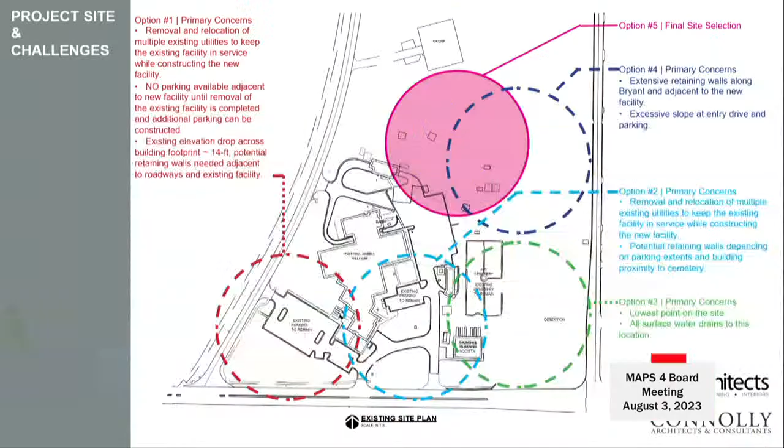Okay, so I want to start with talking a little bit about the site plan. Our location for this project is on the existing property of the existing animal shelter, which is located on Southeast 29th Street. Southeast 29th Street along the bottom here. On the west, we're bordered by Grand Boulevard, which is the road that goes through. Just Trosper Park is just to the west of that. And then over on the east side, we're bordered by Bryant Avenue. And so this is the existing site.

The existing building is located right here. And so it's a fairly large site that we have to deal with, about 14 acres, but our building is very large also. It's about 20,000 square feet larger than the existing facility. So we're looking at a 67,000 square foot building. So it has presented some challenges, even though this site is about 14 acres, all the way up to the very north there's an existing Oklahoma City Highway Patrol building. So from there down, we have about 14 acres to work with, but it is a very challenging site in that we have several obstacles.

We have the existing building that must remain in place while we build the new building. And then just to the east of that is the existing Humane Society building here that must remain. Most people don't know, but there is a pet cemetery right here in the dead center of the property, and that needs to be undisturbed during this project. And then the primary corner, the southeast corner of this property, is actually the lowest spot on the site. So that's where all of the stormwater drains to, which is not ideal for building a building. And then we have all the utilities that come in and feed the existing buildings. So there's several utilities here off of 29th Street that come into the building. There's also a sewer that runs across just north of the pet cemetery that feeds the existing building.

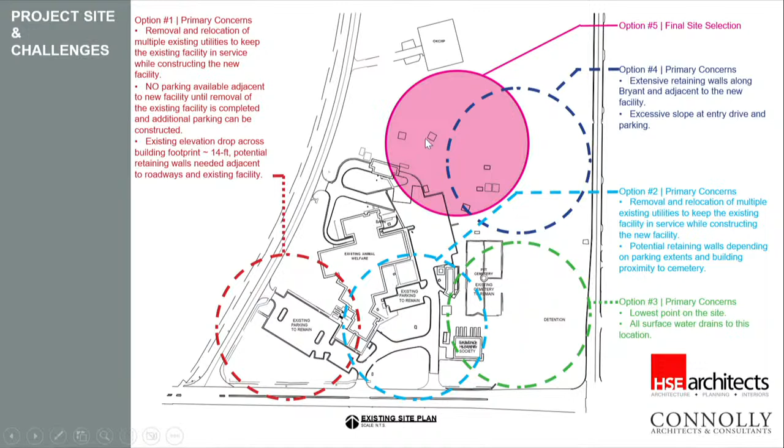So this is our current preliminary site plan, and you'll see the building footprint there in the red color is our proposed new building location. You can see we've moved it all the way to the north of the property. The existing cemetery is here, just right south of us, which allows us to stay away from the sewer that goes right through here.

And then the detention area that's going to be required for our new building can be located in this southeast corner, that's the low spot of the site. Humane Society stays right here. And then we're proposing to leave the existing parking for the existing building so that they can use it for overflow.

They have large events, adoption events on weekends that bring 1,500 people in a day. So the parking we are proposing to provide is adequate on a daily basis, but if we have a large event, they could certainly use this overflow parking. You can see here the entrance off of Bryant works well. We pulled the parking about 60 feet off of the street, which allows us to maneuver that drive, get up into the parking without any retaining walls.

The parking here for customers on the east side is 102 spaces, and the parking on the west side, which would be used for staff and fleet parking, is 142 spaces. And then we also have a new barn that would be associated with this project as well, and the pasture for that barn would all be down here in this green area.

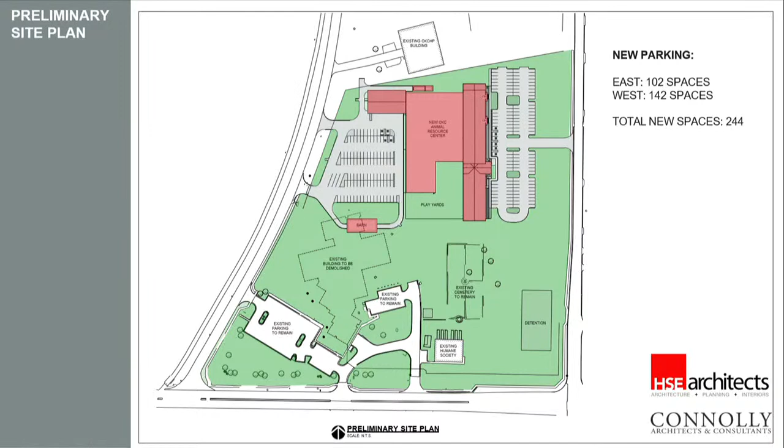Okay, this is what, a little delay there. Back.

There we go. So this is the overall floor plan of the building.

The next two slides are actually enlarged floor plans. Looks like we lost some information over here on the side, but just to orient you, this side over here is the east side that faces Bryant. So this would be the main public entrance for all of the functions of the building.

This baby blue area is all the adoption area. This is where the public would come during these adoption events or just on a daily basis to adopt an animal. Just north of that, in this tan area, is a large meeting and training space that could also be used by the public. The blue area is the clinic, and there would be a public entrance here on the front for the public to come in.

And then the red area is what we call intake, and that's where the public would bring a surrender or a stray animal to drop it off.

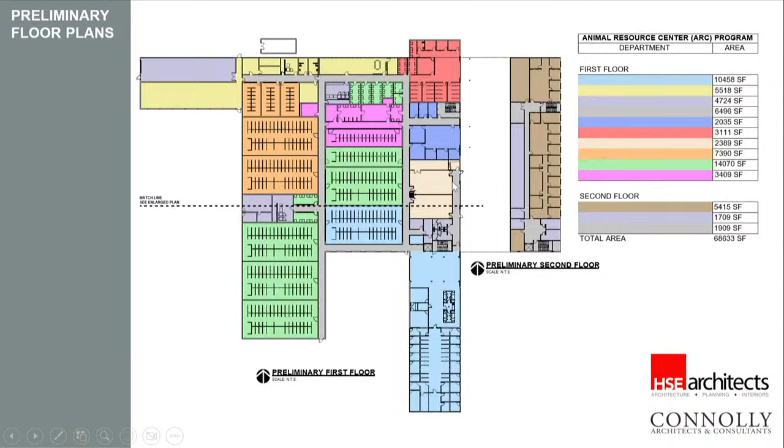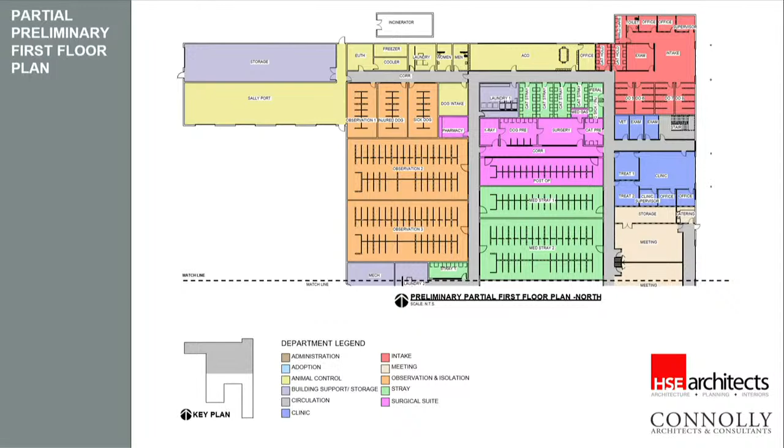So this is just an enlarged plan, showing you a little more detail of the spaces in the north half of the building, and this next slide is the south half of the building.

And there's the floor plan for the administration area on the second floor. We have an elevator, represented by the X down here, and that elevator ends up being in the adoption area down below, which is the most public area, and then there's 2 stairs allowing access to the second floor.

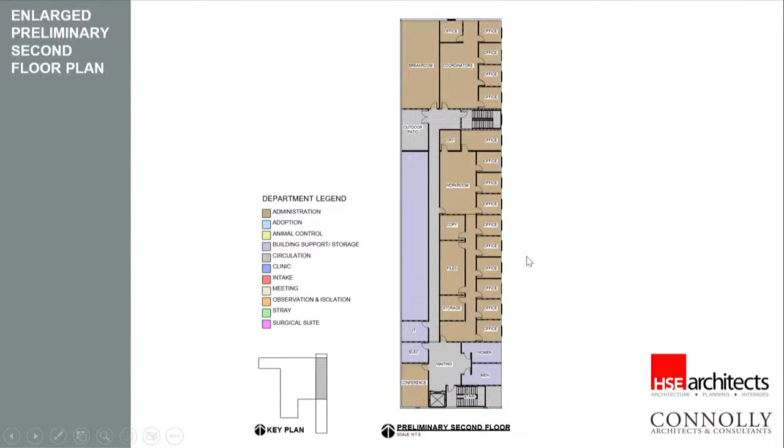Elevations - we've spent a lot of time studying the site, so these elevations are very preliminary. We're currently still exploring materials for the building, but you can get an idea of the basic functions and the basic look we're after.

We intend to have standing seam metal roofs on a good portion of the building so it doesn't look as institutional as their current facility. We'll use materials such as stucco and wood soffits throughout with some stone accents. A lot of the building will be built out of concrete block just because of the durability required in the spaces where the dogs and animals are kept. So we'll use a lot of concrete block, but the exterior will have some additional materials.

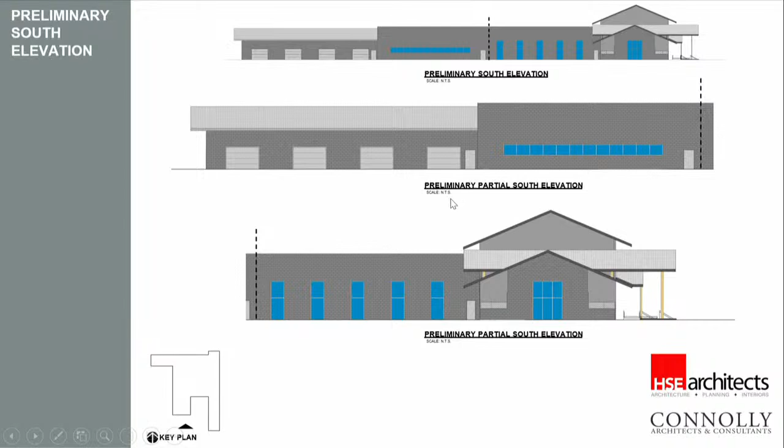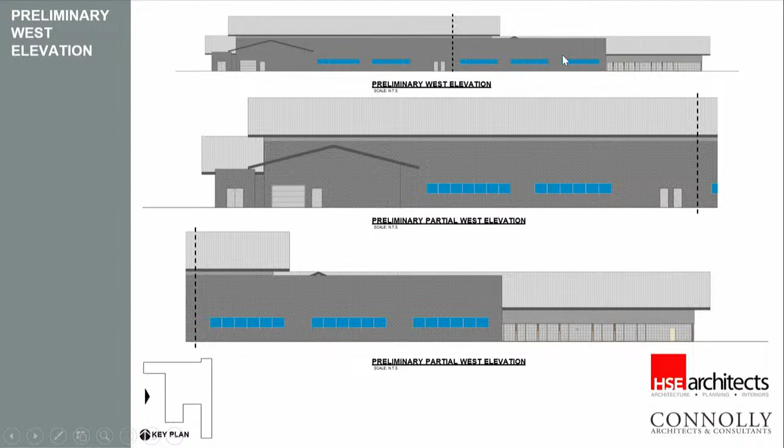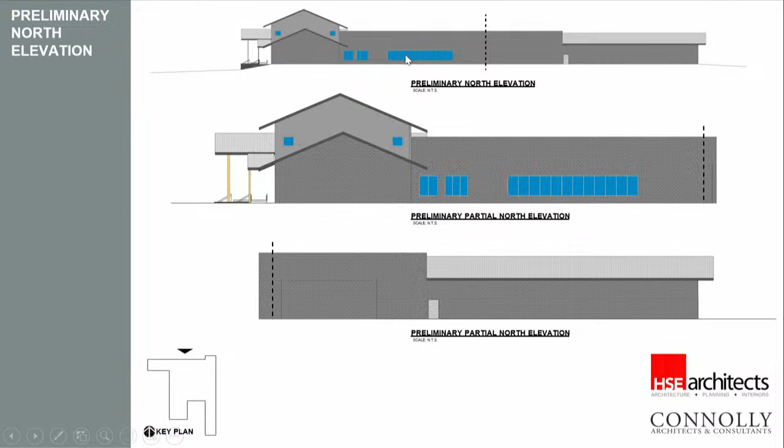Same thing here on the west elevation - this is the sally port and storage, and all of these windows are into the dog kennel areas. North elevation, very similar to the others. This shows the end of the intake area, the second floor admin, and windows into the animal control offices.

The budget for this project was set at just under $32 million. It was originally estimated the building would be around 67,000 square feet. We're pretty close to that currently at just a little over 68,000 square feet. So we're sitting at a budget of about $466 per square foot, which we feel is adequate for the current design. We'll have a more detailed estimate in our upcoming preliminary report.

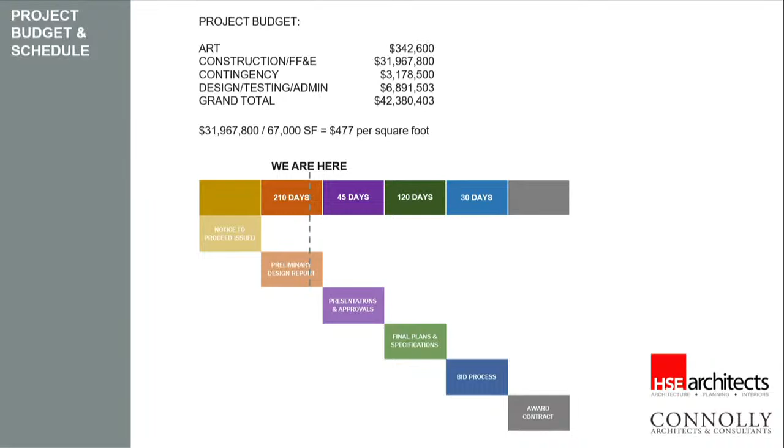At this time, I would just open for questions.

I actually have a quick question. What is detention? Because there is no underground storm sewer in the area where normally you would tie into an underground storm sewer.

Here, all of the water is surface drained to a low spot on the site. The detention is where that water would be held so that you don't overcome the streets with water and runoff. You hold it for a period of time and then let it out slowly. So that detention area would be built to hold water just temporarily right after it rains really hard, but then it drains out slowly. So it won't be a pond - it might hold water just when it's raining really hard.

Thank you. Sure, any other questions for Todd? Yes - would you mind going back to the renderings? Yeah, these. Okay, thank you. Is what we're seeing here almost literally what we'll see in real life in a few years?

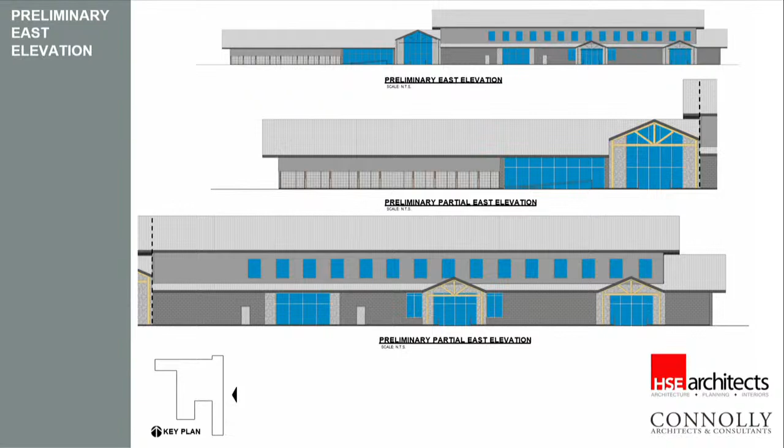No, that's why I prefaced it by saying we've spent a lot of time - we just 2 weeks ago finalized the site location, so we're in the process of designing the exterior, and this is very preliminary. The final material selections and final design will be developed from this stage. So these are the materials we're heading toward? No, no, it's a hint of what the materials might be, but the final selection has not been determined.

Could you remind us the materials again? You said concrete? Yeah, so we're looking at the potential of some stone veneer near the entrances. These trusses - let me go to the bigger plan.

These trusses would either be wood or, to minimize maintenance, we might do those out of steel. We would have wood soffits, or actually an aluminum product that looks like wood, with a wood grain to it. All the soffits throughout the interior of the adoption area would have wood soffit. There would be some on the second floor, which we're thinking would probably be a stucco product - it's fairly economical. Then we could do some different materials down below, maybe some more stone on the first floor.

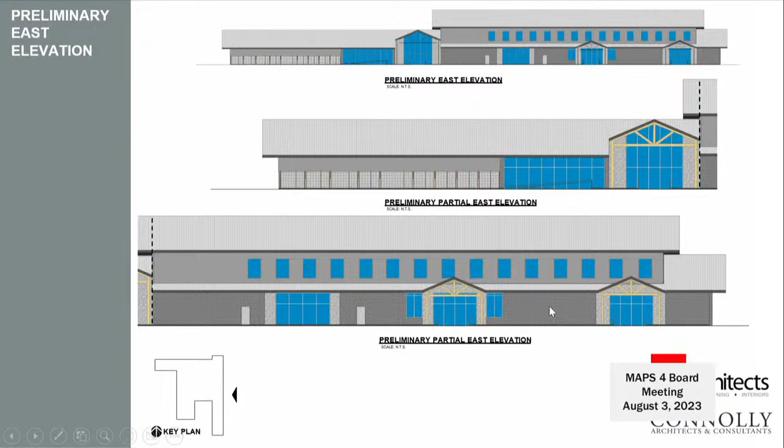I've pulled up the images from when this project first came to council as a proposal, with MAPS 4 in the late spring of '19, early summer.

How much of these renderings is informing what we're seeing here? Yeah, so in that exterior rendering, you saw the pitched roofs with the wood soffits and the wood trusses, and that's our intent here as well.

You're looking at more of a polished rendering, which we haven't got to that stage yet.

So I'd like to express some early concerns about this, and it's fresh on my mind because on the 12th, I and several residents are about to head out to do volunteer work mapping an urban heat island. I think you're familiar, through sustainability, where we'll be driving at 3 different points, some of us on a bike, 3 different points during a day. I'm sure you've heard some of this on KOSU or you're just aware from staff.

We're going to be putting a sensor on our vehicles, and it will take the temperature of certain areas of our city 3 different times a day to better understand the ways in which sun is hitting concrete, asphalt, buildings, and raising the temperatures in a lot of the city, like a lot. I think we're about to find out an overwhelming majority of the city is in fact an urban heat island with a lack of shade from trees and shade structures.

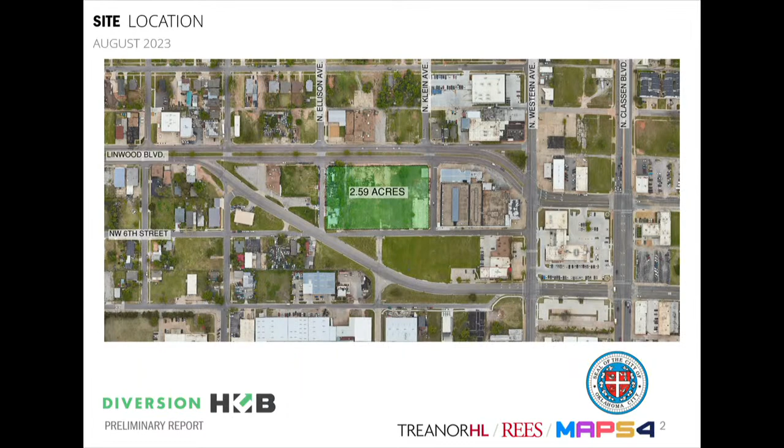The site location is indicated here — we all saw this last time, but just a reminder: Linwood Boulevard, Northwest 6th Street, between Klein and Ellison Avenue. We've brought a more developed landscape plan with us today, and as Farouk said, we worked to get additional comments from Councilperson Cooper, and we essentially have a similar layout to what we brought last time.

We do have the building centered on the site. We have the client parking lot on the east side, the staff parking lot on the west side, and we've added more landscaping and trees to the site plan.

We've added trees along Linwood Boulevard, where we know there will be pedestrian and bicycle traffic coming to the site. We've also angled and streamlined the main paths to the building entrance to help direct clients there with the most direct route. You'll see later in the visualization how that entrance looks with landscaping and different seating positions.

We also added a few access points, including angled sidewalks Rachel talked about, providing greater access from 6th and Linwood. We've also widened the sidewalk by 2 feet along Linwood to make it more pedestrian friendly, and we've included that in the cost estimate to ensure a wider, friendlier pedestrian sidewalk along Linwood. Other things we'll cover, like Rachel said, in the visualization.

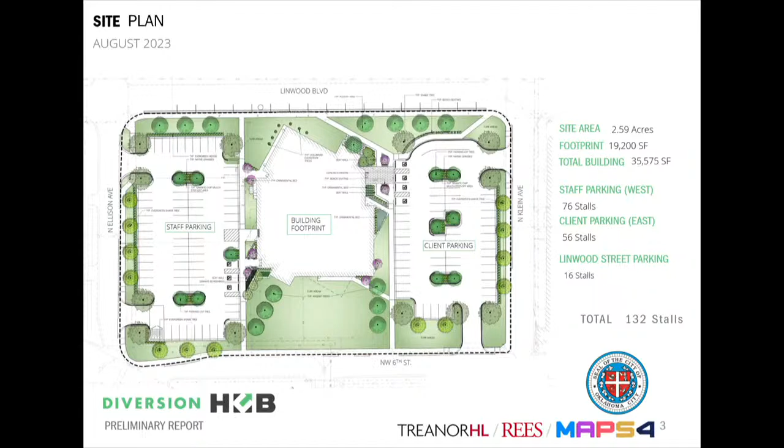This is just some additional visualization that we're developing.

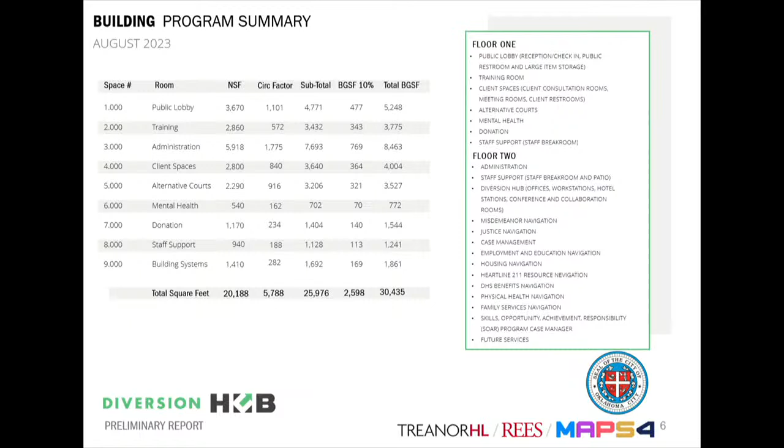As far as the program and planning for the building, we've included a program slide that lists all of the functions occurring in the building, but I'm going to move on to the floor plan slide and talk about where those spaces are located. Here's the ground floor, where all of the client spaces and client resource spaces occur—the entire ground floor functions for the clients.

In the red color, we have a training space. It can be one large space or divided into two. This can be utilized by Diversion Hub staff or their partners for after-hours training, providing another space for training and resources for clients to access.

The blue area is the main entry lobby—I probably should have started with that. The lobby is very generous, and what the Diversion Hub is seeking is to make people feel comfortable, not crowded. If they need personal space, there's a variety of seating. As you'll see in the visualization, there are interior tools we're using to divide the space a bit while keeping it open and visible, so you can see how busy it is and what activities are going on.

The lobby is the main access point to the training room and to the purple area in the center, which is the primary client space. There are 10 different client meeting rooms, plus 3 medium-sized conference and training spaces, all dedicated for use with clients by partners and staff. These are types of spaces the Diversion Hub does not have now, so they'll be able to expand their capabilities of working with clients.

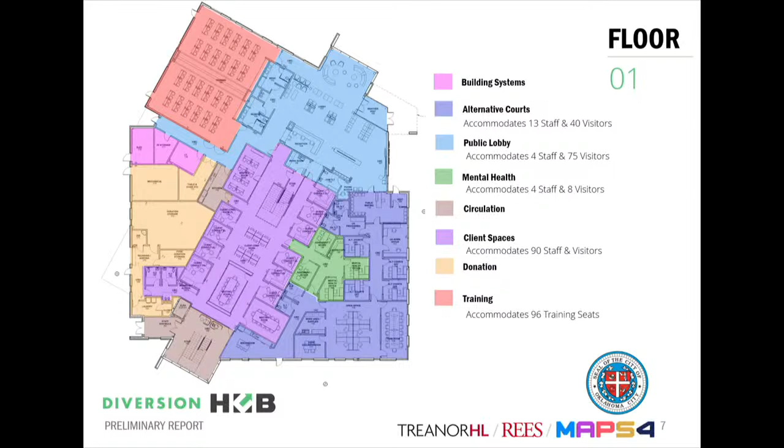But you'll also see a floor opening above that at the second floor. So we know that these client spaces are fairly internal to the building, so we are working to bring natural light in from above. And then we'll also have some natural light opportunity coming off both the lobby and that south stair, as there's always a visual connection to the mission. Yeah, and you'll see that a little more in the imagery.

As corny as it may sound, one of our clients coined this phrase, but we want to make sure that everybody in the building has the right to light, right? So the staff, the clients, everybody has access to natural light regardless of where they are in the building.

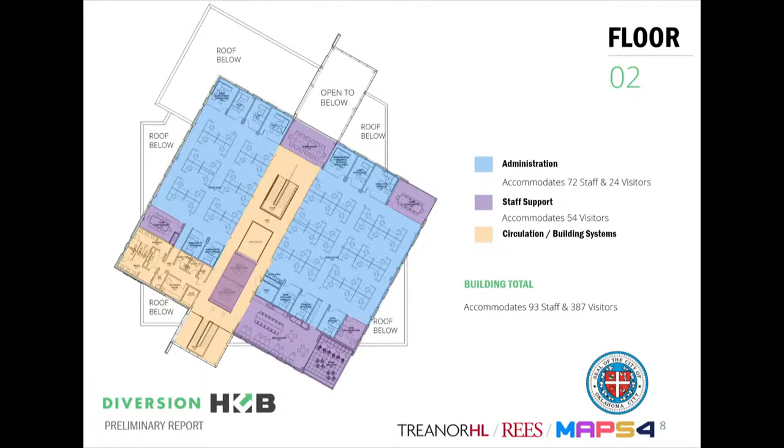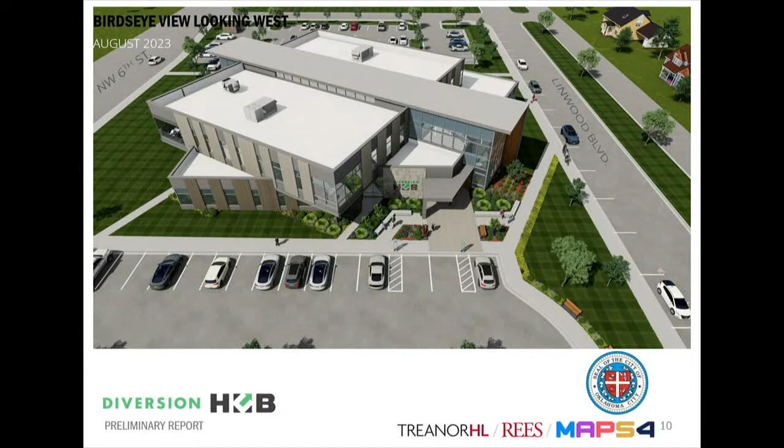Okay, now we know you've seen some of the exterior imagery. A couple of the things that you're going to see are still in process - we're about to start having some conversations about the public art piece. That may or may not impact how and where and what we do with signage, so that's still in process. So we're going to go through these fairly quickly.

So we're looking towards the west. You can see Linwood on your right. We've got a lot more of the landscaping integrated into the 3D imagery.

So you have the main entrance. You have signage on the building there, but also we intend to have a monument sign out in front of the building. There's also, just to the left of the Diversion Hub signage on the building, a separate entrance for after hours for the diversion courts, alternative courts.

Really the biggest change that we've made, primarily from a budget standpoint, is the spine got a little bit shorter. There's less glass on the building, but there's the same amount of vision glass that we've always had. We've just reduced the glass that was over unoccupied spaces, from a cost standpoint.

We have two different colors of brick. We're proposing some limestone, some metal panel, some wood-look soffits as we go around the building. As we go through these, I'm going to click through them quickly and just point things out.

You can see up at the top is where the staff spaces are. Lots of windows into those areas, as well as the alternative courts, and lots of windows facing north and east into that lobby.

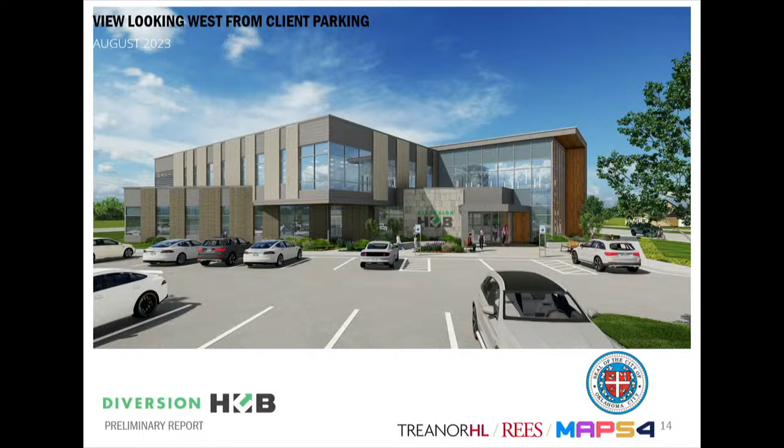Councilman Cooper, I know parking is a huge issue to you. I know you mentioned heat island effect earlier today. Correct me if I'm wrong, our proposal is for all the parking to be concrete, not asphalt, which is better for heat island effect because it's lighter and more reflective. You are never walking across more than 60 feet when you're in the parking areas, and I think we mentioned last time that the reason we split it was to mitigate the large area of parking.

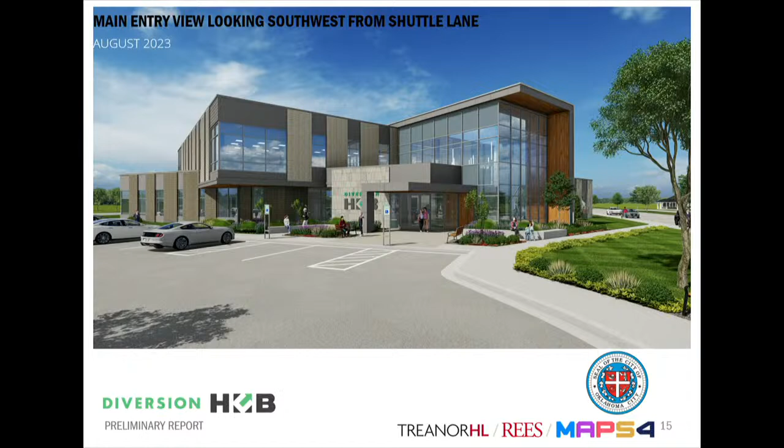Again, we're just swinging around. We want to make sure that this building—and this is applicable outside, but really applicable inside when we show you the interior images—whether you're a client, a visitor, or staff, we want you to be inspired, hopeful, and feel welcome. So making sure that the scale of things is appropriate, making sure that the materiality and the colors are appropriate. Again, just looking from Linwood.

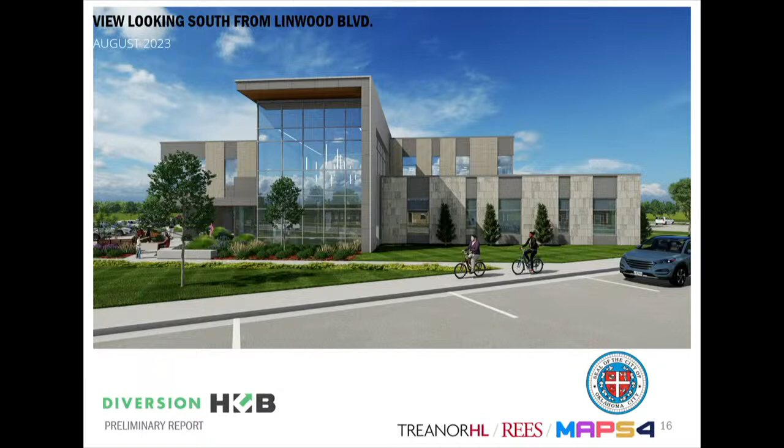I think one of the things that's fun about this building, and we've talked about this in all the meetings, is it has no backside. So we're really trying to be very intentional about every little detail and placement of windows, the materials, the orientation to the street, opportunities for outdoor spaces and landscaping. This is really the most backside of the building, but it's a very visible side of the building, so we want to make sure we're mindful of all of that.

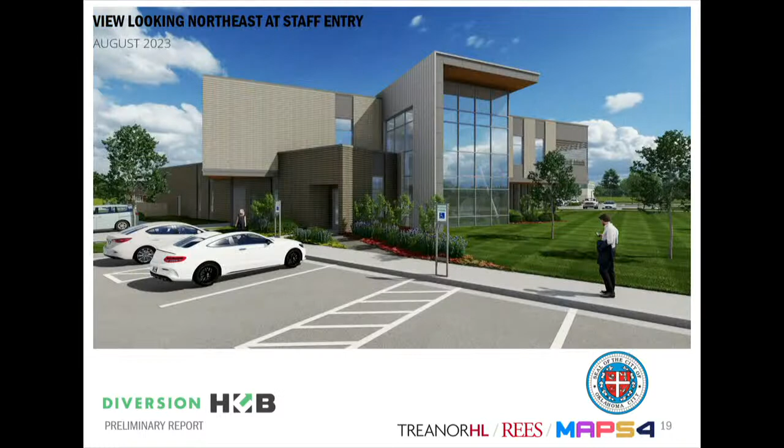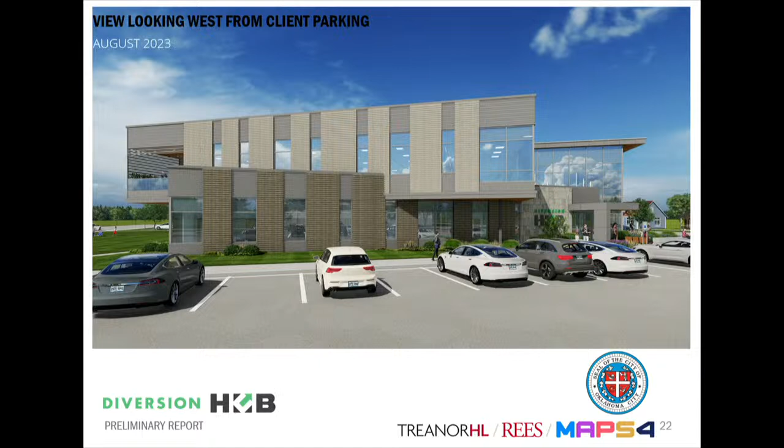We've spent a lot of time at Diversion Hub and around their clients. It's been really important for us to understand what they're going through, understand the experience, and make that better, really enhancing the services they're able to get as they come to Diversion Hub.

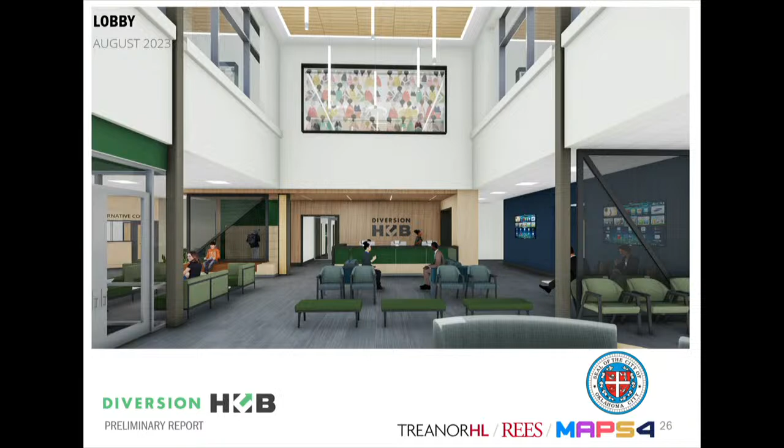Now we're going to talk about the inside. One thing we always try to do, if possible, is never have a north-facing entry door. So you enter from the east and immediately turn left into the building and go south. You see those doors to the vestibule on your left, and you're looking towards the reception desk in the middle. Up at the top is a glass element with an image on it, so you can see through it from the second floor, but we didn't want the clients to feel like people were looking down on them.

Lots of wood and wood look. One of the things Rachel talked about is being mindful that sometimes when different groups or clients are there, there may be people who don't like each other. So how do we separate the space but also keep it relatively open so it can be supervised and work well? It's also not just one big rectangular space, so there are lots of places someone can go and find their own space.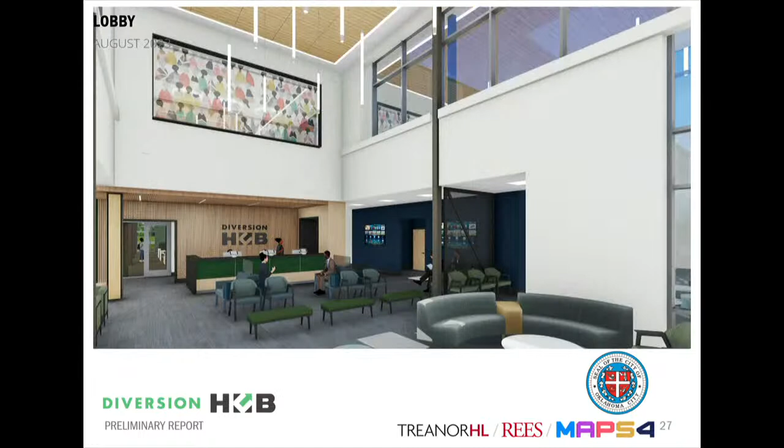Clients would enter through that door to the left. There's also access to the alternative courts, and restrooms and the training spaces are off behind that blue wall we talked about, on the right. We're just going to click through these because they're different views of the lobby space.

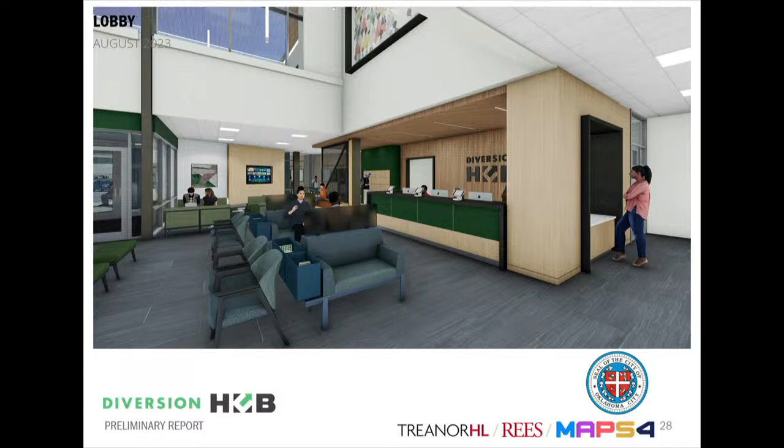Just thinking again about the customer experience and client experience, something a little bit different than what they have today. Today it's cramped, small, all white, kind of institutional. Reception is behind glass, so we really want to create a much better experience and set the tone, de-escalating from the minute you walk in the building.

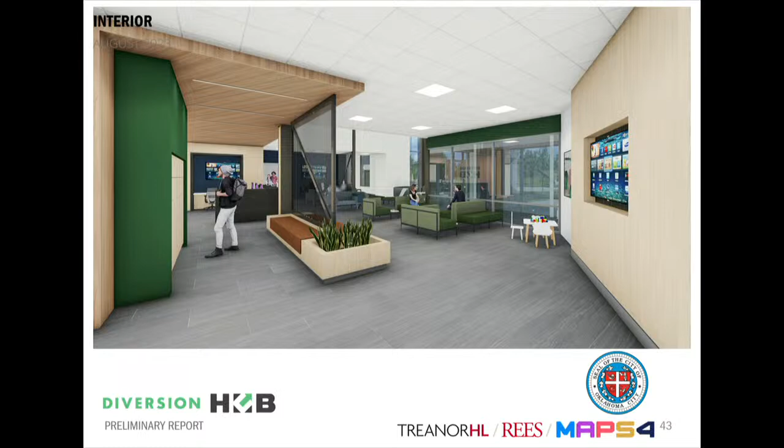One of the other things we pointed out in the meeting on Tuesday is that you're going to see a lot of details like the metal screens, the built-in benches, a lot of the colors. You're going to see the same things in the client spaces that you see in the lobby, and the same things from the client spaces to the second floor and the staff spaces.

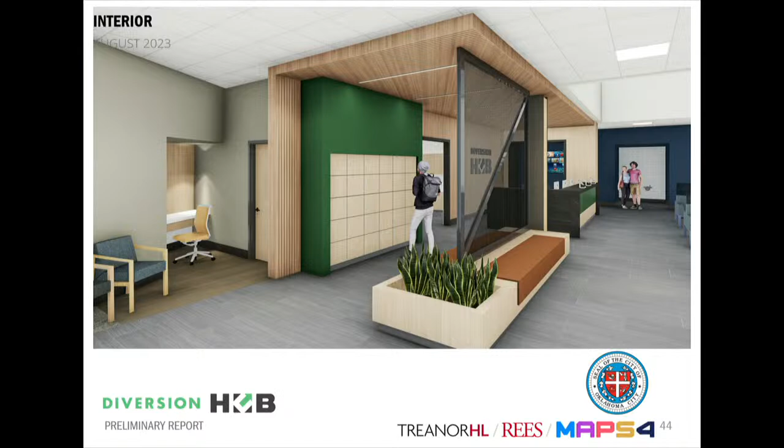We also talked about some of those amenities for clients. You have outdoor storage for bicycles, indoor locker storage for smaller items, large storage at the back of the building, and a little phone nook over here to the left in case you need to make a phone call. So lots of amenities for the clients.

The training space is subdividable into two, a larger volume than they have today in their training room, and it's a column-free space, which they don't have today. But we just want to make sure we're providing spaces that work well, work better, and do the things that they need to do.

Also thinking about hospitality in all these spaces, so providing some space for storage and food and drink at the back of the room as clients or community are coming in for meetings.

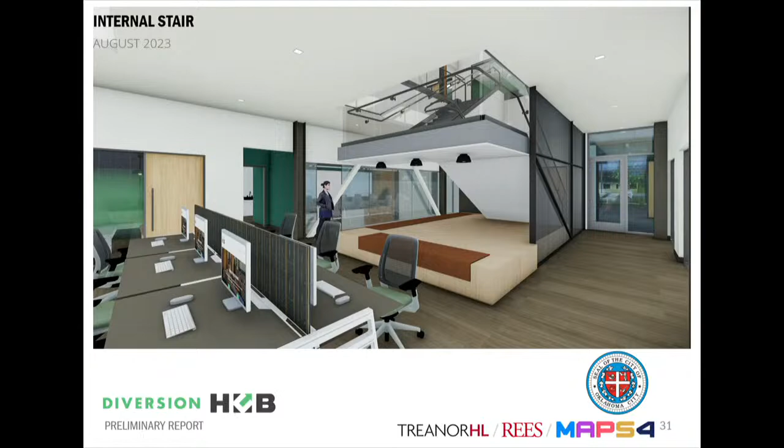This is that communicating stair that Rachel talked about. It's secured from the staff spaces, but one of the things we wanted to make sure is that there's easy access for the staff to the client spaces. We looked for ways to bring in natural light, most of which comes in from the opening to our right, which you'll see in a minute. But we also wanted to mitigate and not make it too in your face that it's secure and separate, really creating a feature in that space.

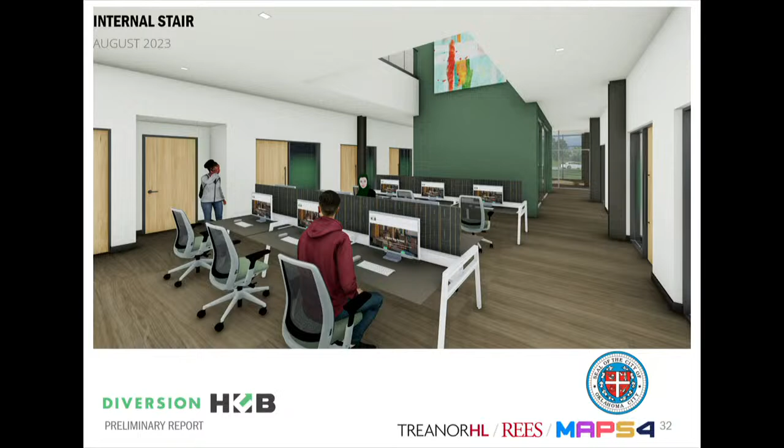Rachel also talked about the client spaces along the sides where they're meeting with their case managers. In the middle, that green element that goes up through the second floor is a stack of meeting and training spaces on both levels, and then those workstation areas. And then again, you've got views to outside and daylight at the south end beyond the green space.

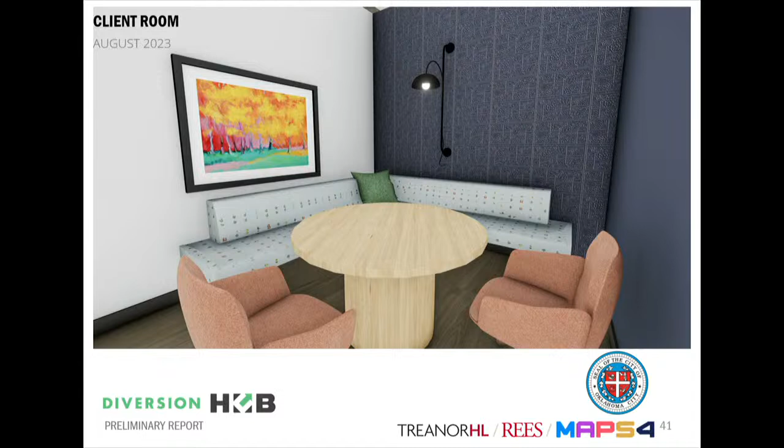Just a couple examples of what the client spaces might look like, sort of similar philosophy to what they have today. They've learned a lot about what works and what doesn't work, so one of the things we've talked about is setting those up in a couple different ways, just so they have some variety, different postures of seating.

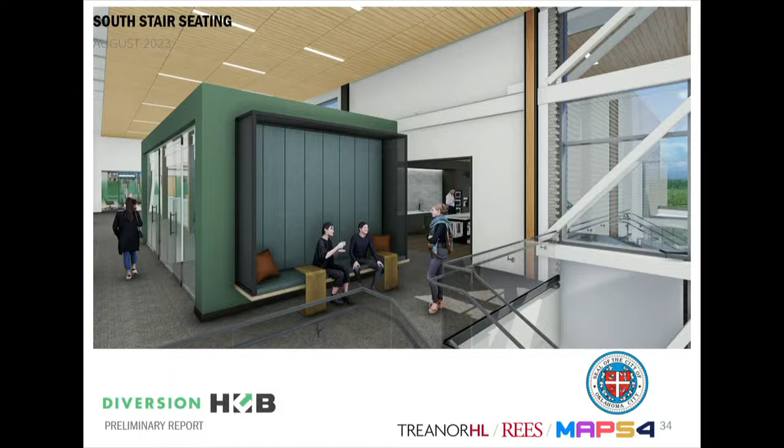Those meeting spaces in the green element, which again goes down to the first floor, and then that open break area to your right. There are no dead ends, so you always have a way to loop and move around and go different ways throughout the floor, which we think is really important.

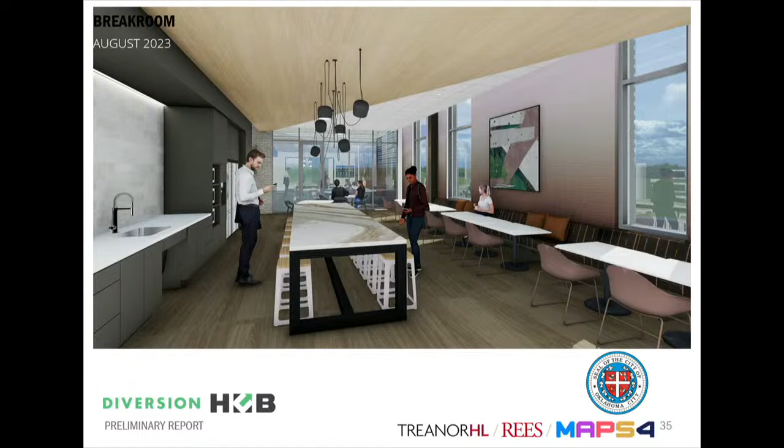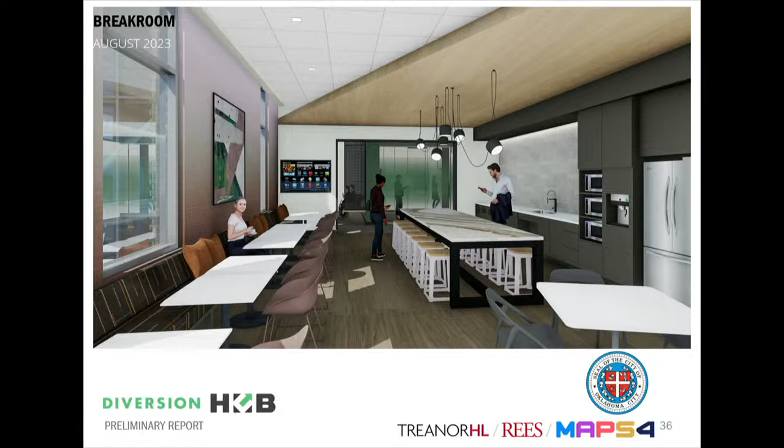You can see lots of natural light. You have a view out onto the employee patio area. This is really set up to not just be a break room. It's a place you can meet, a place you can work, they can have gatherings. It's really important that if we're going to dedicate any dollars to a space like this, that it does more than one thing.

And now we're getting into those staff work areas. Again, bright, light, team-oriented. We want to make sure that when you're seated at your workstation, you have some sense of privacy and place and space, but then when you stand up, you can see the team and collaborate. Lots and lots of access to natural light, and lots of wood look elements through the doors, the ceilings, and inserts in the columns.

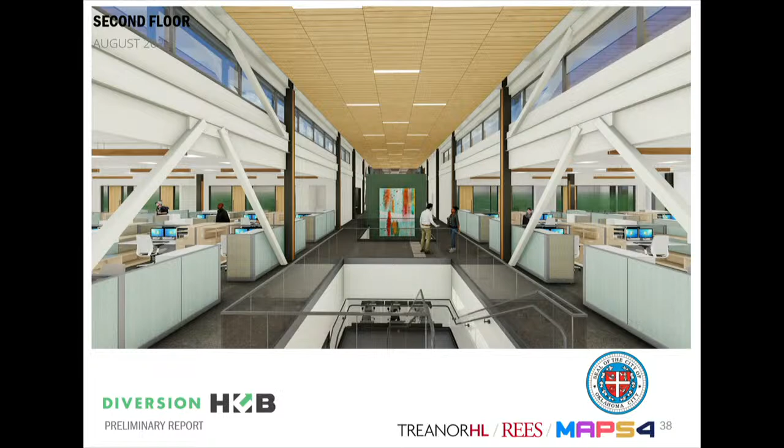One of the other things we've talked a lot about is transparency and translucency where appropriate. So again, we want to make sure that we're bringing natural light into or through those spaces if they are enclosed spaces on an exterior.

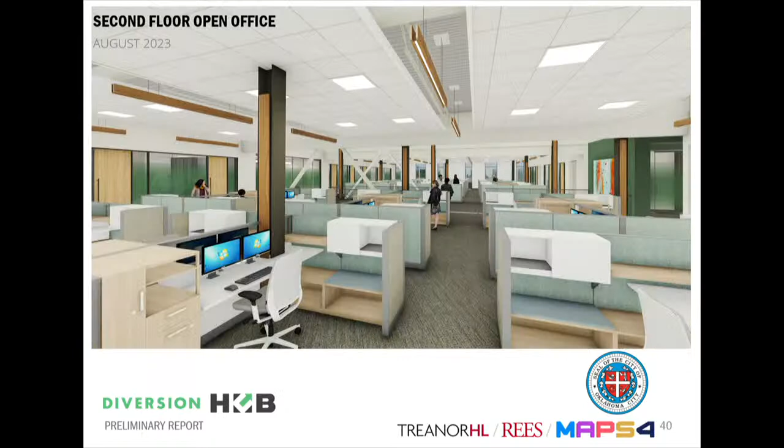And then we'll just click through some of these images as we go through. Right now the furniture is just placeholders. We haven't really started working through that in detail, but that is something we're working through. And now we're going to quickly do an animation.

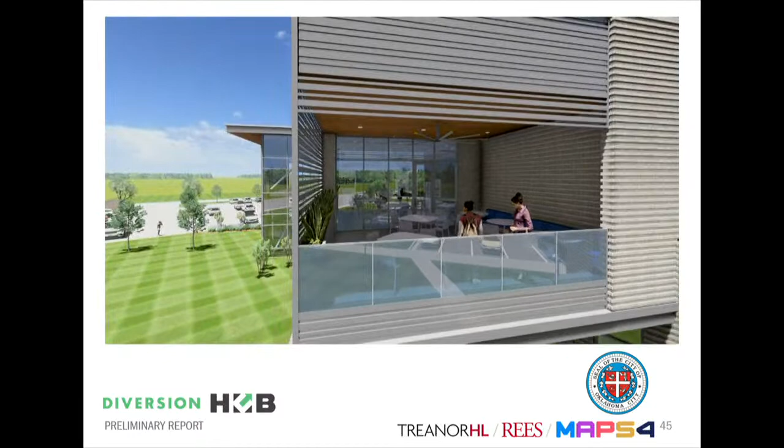Right, and now we move from design to the even more exciting budget topic. For the preliminary report, we were required to include an estimate along with the design and the drawings. On the top portion is a summary of the project budget. The original fixed limit of construction from MAPS was allotted to be $13,023,400.

The Arnall Foundation has made a commitment in a number of ways to the diversion hub. They have donated the land, the property for the project, and they've also made an additional commitment of $1 million to fund some additional site infrastructure and site development. So we've totaled that together as $15,023,400. MAPS was able to move the land acquisition budget over into the construction budget for that reason.

And then down at the bottom portion is the construction estimate, so you'll see the total funding. Our current preliminary report estimate is coming in at $14,930,479, so we are just under budget at this point. We understand that we're still in process, and that's something we'll continue to track and keep our eyes on as we move along.

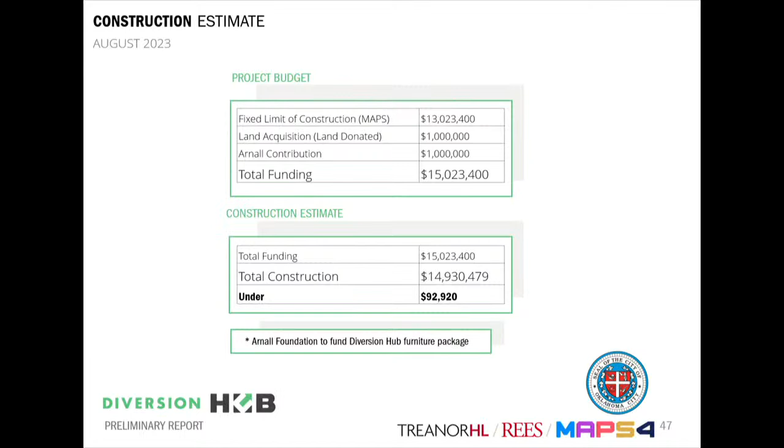As far as schedule goes, we are in the August 2023 portion, working towards staff review and council approval. Upon receiving approval, we would be excited to move into the construction document and technical drawing specification phase of the project. We have 120 days for that. It then goes back out for staff review, another 45 days. So looking at January to bid it out, with construction beginning approximately in April 2024.

We thank you all for your time, and we'd love to hear questions and comments. Anybody have any questions for Farouk or Rachel?

I just have some comments. Thank you very much for incorporating some of our feedback from the last meeting, especially the landscaping and the overall welcoming nature of this. Hearing you speak about it being a place that is more gentle, more human friendly, talking about the natural light, I really appreciate your point of view on those things, and I can see it in the renderings. So thank you very much for adding those thoughts and intention, and our feedback, and really making this a beautiful building that I hope will heal a lot of people. Thank you. We appreciate it.

I would just like to add that I'm on the subcommittee, and we saw this presentation on Tuesday, and it doesn't seem to ever get old for me. I just love seeing the updates. I was really pleased by the thoughtful changes that you made, and I want to thank Councilman Cooper for his part in that, and the CAB for their comments last time. I tend to be more analytical, but looking at this space, I just feel soothed by it, so I know it will definitely have that effect on other people. And I'm also very excited, and here's my analytical side, at the fact that you're able to manage that budget by making changes that I wouldn't have even been able to tell. So I want to thank you for working so hard on this. Thank you.